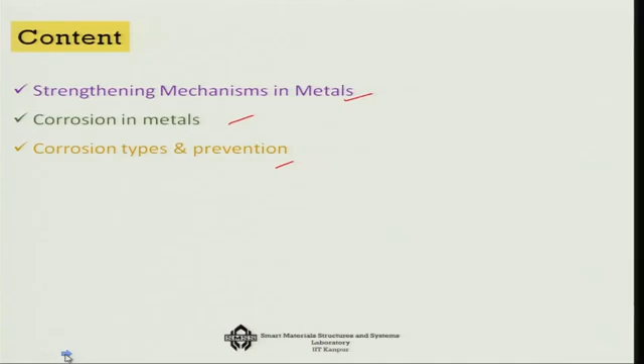So, strengthening mechanisms in metals, corrosions in metals, and some of the corrosion types and their prevention. This is what is our object of study today. Now, first of all, the strengthening mechanisms in metals.

One thing we have already seen is that dislocations, if present in a metal, degrade the material properties. As long as the dislocation is limited inside a particular grain, there is no problem in the sense that the macroscopic properties will not be much affected, but if many adjacent grains get affected by dislocation, that would substantially affect the mechanical properties.

So the ability of a metal to plastically deform depends on the ability of dislocations to move across the grains. If you can stop this movement across the grains, you can make a material harder and stronger. There are several ways to do this: one is through grain size reduction, then solid solution strengthening, and of course there is strain hardening, precipitation hardening, etc.

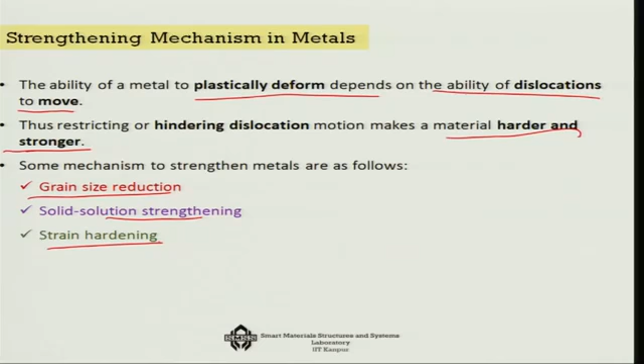Let us try to look at some of them one by one. First of all, we discuss grain size reduction. The grain boundary acts as a barrier for dislocations, as we just said, but how does it act as a barrier for dislocation? There are two reasons by which it can happen.

One is the misorientation: if two grains are there and their lattices are not oriented the same way, it will be difficult for a dislocation to pass into another grain. So if there is a loss of alignment between the lattice structure of the two grains - suppose you consider this to be one grain and then you have this one, the two lattices are not aligned - there is an angle between them. So then it will be difficult for a dislocation to move from this to the next lattice. That is what is called misorientation.

Now, imagine that in terms of number of grains in a particular surface area, if you have more and more of these grains which are misoriented with respect to each other, it will be more difficult for the dislocation to affect all of them on a statistical scale. So the more grains it will face, the more difficult it will be for the dislocation to pass. That is one reason why smaller grains, meaning more grain boundaries, would stop dislocations very effectively from moving across the grain boundaries.

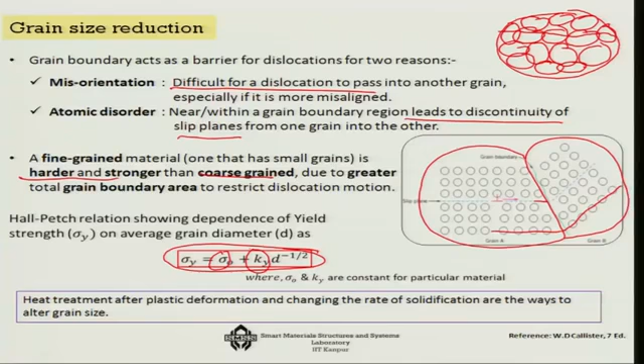Interestingly, Hall-Petch found that this same relationship holds not only for mild steel but for other materials too, and people have experimentally determined these Hall-Petch constants. For copper, sigma 0 is 25 MPa and K is about 0.11 MPa meter to the power half; for titanium it's 80 and 0.40; for mild steel 70 and 0.74; for Ni3Al it's 300 and 1.7.

Now, one important thing is that it is the K value which actually determines how much effect the grain diameter D will have on the overall sigma y.

So suppose I consider mild steel, and I take the grain diameter ranging from about 100 nanometers to about 1000 nanometers, using sigma 0 and K values such that sigma y equals 70 plus 0.74 times d to the power minus half, and plot all these values.

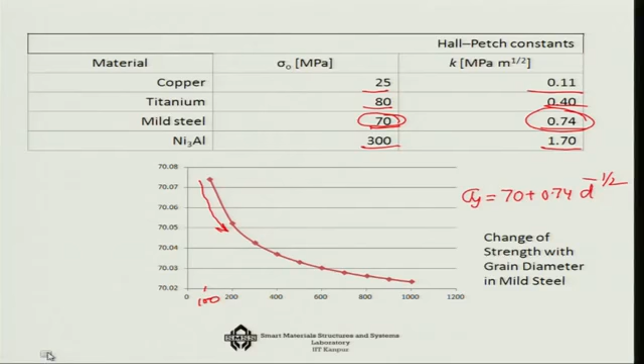We can see that as the grain size increases, sigma y decreases, even though not at a very high rate. So the Hall-Petch relation nicely describes how grain size affects the strength of mild steel, and similarly for other alloys.

Now let us talk about another form of strengthening, known as solid solution strengthening. In this case, strengthening occurs because of the so-called pinning of impurities inside the grain, which stops the growth of dislocations or dislocation piling.

In fact, pure metals are almost always softer than their alloys. Why? Because in alloys, as I talked earlier, the alloying atoms substitute into a solid solution or occupy interstitial spaces. Whenever these impurities go into interstitial or substitutional positions, certain effects occur.

If the atoms that go inside are larger in size than the host atoms, a compressive strain develops, while smaller impurity atoms impose a tensile strain on the host atoms. A larger atom gives a compressive strain because it takes more space, pushing all the other atoms inside the grain. A smaller atom causes others to move toward it, resulting in tensile strain.

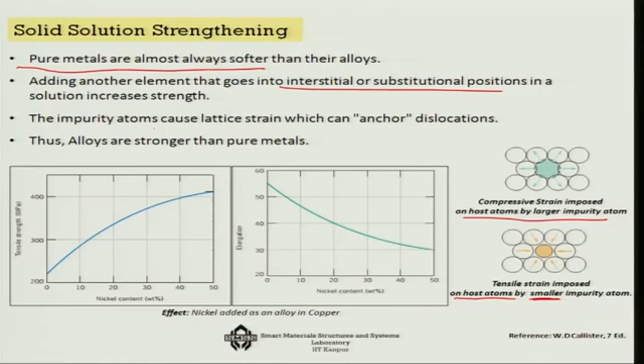In both cases, you can influence the dislocation stress, which is denoted by the Burgers vector, with the help of impurities. So impurities can effectively anchor these dislocations, which is why alloys are generally much stronger than pure metals.

For example, consider nickel weight percentage in copper: as the nickel alloying content increases, the tensile strength increases, while elongation decreases because the material becomes harder and harder. That is another strategy for making pure metals harder, by inserting impurities.

Now we will talk about strain hardening. In the other cases you are playing with the grain structure, but here you are not. Instead, you use work hardening or cold working in such a manner that strain is imposed on the nearby atoms inside the grain structure, thus increasing the strength of the material.

That strain increases the strength, as you must have seen in the stress-strain diagram itself, where beyond a certain percentage of strain, a strain hardening region occurs. The idea is similar in the formation of the metal itself, where this technique is used and hardening happens to the system.

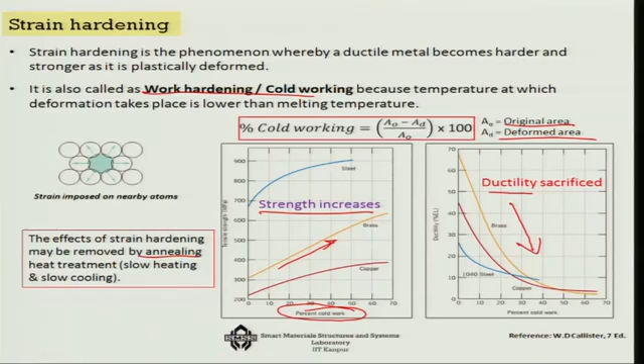Now, the strength that is increased can sometimes be controlled through annealing, a heat treatment process. Through slow heating and slow cooling, you can release some of it, and thus bring about a trade-off solution between the strength and the ductility of a system.

So far we have discussed three methods. One is the refining of the grain boundaries, as these grain boundaries serve as barriers to dislocation motion. By having a more refined polycrystalline material, you can increase the strength. Of course, there is a degree up to which you can do it.

Later on, there's something called the reverse Hall-Petch effect. People found out that if you reduce the grain structure beyond a certain level, this becomes counterproductive, and it actually depends on the size of the dislocation. If suppose the size of a dislocation is 10 nanometers, and you bring your grain structure to a similar level, then it would not be difficult for the dislocations to get piled up across the grains anymore, and hence instead of increase of strength, you may see a decrease of strength. So the reverse effect may happen if you reduce the grains too much. There is an optimal level of grain size for every metallic system.

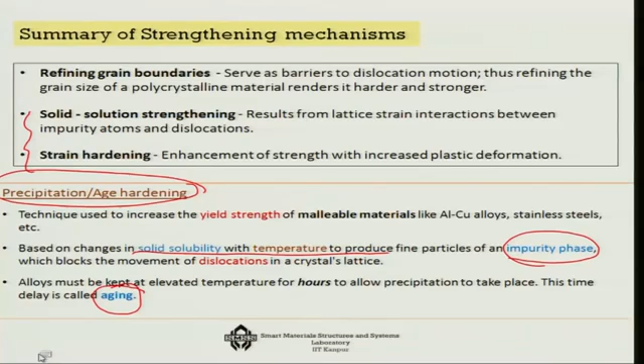Based on the changes in solid solubility with temperature, you can produce fine particles of an impurity phase, which can block the movement of dislocations. For example, at a slightly higher temperature, you may see more impurities spread over inside a pure metal, and they act like nucleation points. Then, as you keep it at a very low cooling rate, gradually these impurities affect the grain formation, and as a result affect the hardening. This process of changing temperature to change solubility and later allowing more time for grain growth is known as aging. So precipitation and age hardening, these two things actually go hand in hand. This is another mechanism for controlling the hardening of pure metal.

Now, so far whatever we have discussed is related to the improvement of the metal. However, metals also suffer from a problem that ceramics would not suffer from: they get corroded. I have talked about this in the very beginning, if you remember, I showed you the periodic table and the relative positions of the metals, and their tendency to give away electrons. As a result of this tendency, they can easily react with the environment, and those inorganic materials which can absorb these electrons can quickly react with these metals, and this results in corrosion.

These corrosions are definitely destructive, unintentional attacks on structures, and they are basically electrochemical in nature. You can see the corrosion of a ship, an automobile, or a pipeline. In every case, the corrosion creates a severe problem.

Now, the material loss that takes place can be either through dissolution or through formation of scale or a film. That means the reaction takes place and the compound forms over the surface like a film or a thin scale. For example, you take an aluminum vessel, put water in it, and try to heat it up, and you do this several times, you will gradually see a layer of aluminum oxide formed over the aluminum at higher temperature, coming like a green sheet over it. So like a thin scale or film.

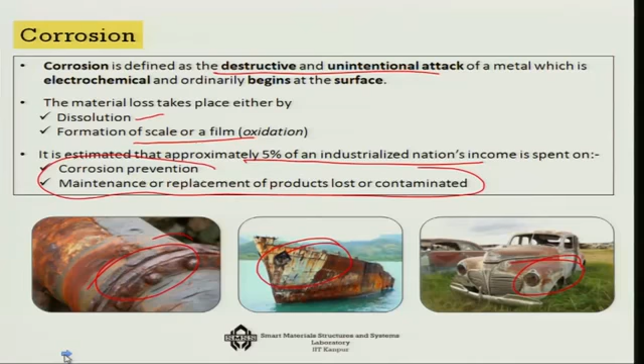There are various ways in which this takes place, and approximately 5%, even higher in some cases, of industrialized nations' income is generally spent on corrosion prevention, maintenance, etc. So that means it is a big issue for various systems. Now, there are two parts of these kinds of chemical corrosions: one is the oxidation reaction, or anodic reaction.

This relates to the tendency of metals to give up free electrons, which is the anodic part. The cathodic part is the opposite, where electrons are transferred to another chemical species based on their position in the periodic table, determining their ability to accept electrons.

For example, zinc can readily give up two electrons, which can be taken up by hydrogen. The moment you keep zinc, it converts to zinc ion and hydrogen gas is formed. In fact, zinc is often given as a sacrificial layer coating, so that it reacts readily and saves the metal.

So, I will talk about the significance of this type of layer.

When we select a material to provide a protective layer over the original material, there is something called the Pilling-Bedworth ratio, PB, which is the volume of the oxide formed during reaction divided by the volume of metal consumed in the oxidation.

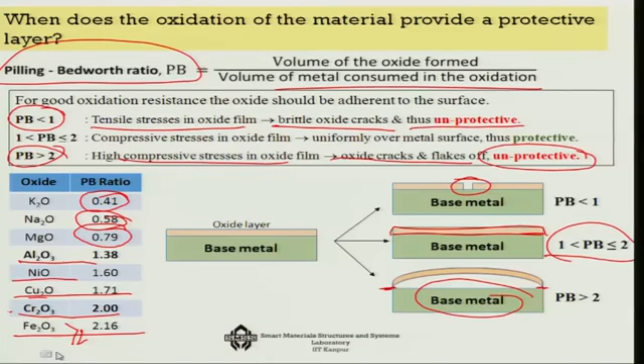Then there are other metals going further, like chromium, which is possibly the last usable one. Beyond chromium, the ratio is greater than 2, so it cannot be used as a protective material. Thus the PB ratio works as a nice guide in choosing materials.

The other point is the reactivity of a metal in seawater, which is very important particularly for seaworthy vehicles. Susceptibility to corrosion in seawater reduces as you go upward in the series.

Consider Monel, which is very heavily used today for seaside nuclear power plants, because of its high anti-corrosion capacity. We already noted the advantage of nickel on copper in terms of high strength, so both from a corrosion and strength point of view, Monel is an excellent material, and Inconel is another one.

In fact, the secret of making this material is very industrially significant, and not many nations would like to part with these trade secrets.

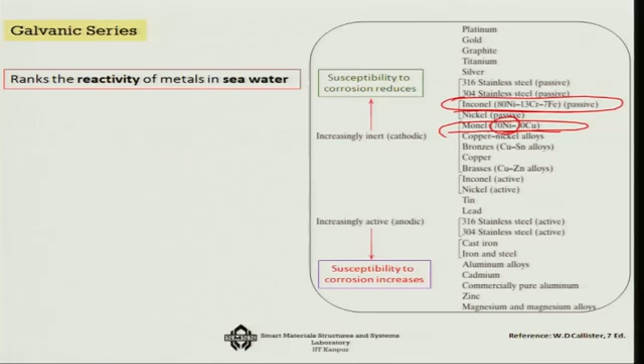Then you have stainless steels, titanium, graphite, gold or platinum, which are even better but cannot be used practically. In terms of susceptibility, you have to be cautious about using iron, aluminum alloy, and cadmium. Zinc is highly susceptible, as we have seen. So the galvanic series gives us good guidance on the reactivity of metals in seawater.

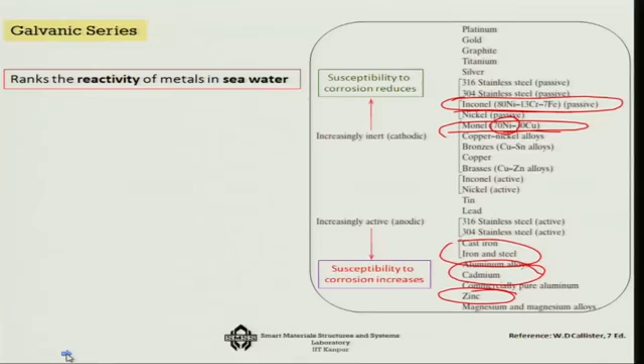Corrosions are generally of two types. One is uniform attack corrosion, the most common form. As you can see in this jetty, the anchoring positions are uniformly attacked due to salty conditions. Oxidation and reduction reactions occur randomly all over the surface, resulting in maximum metal loss in this kind of uniform attack.

The other type is known as galvanic corrosion. This is a very specific case where two different types of metals are used for joining or doing some work, like a junction of two different types of metals, say a copper-steel junction. This kind of thing happens in boilers, for example, and in aircraft wiring systems, wherever you are anchoring these wires, those are junctions with dissimilar metals in the galvanic series. They come into close contact with each other due to mechanical actions, and the moment that happens, there will be a kind of cell formation.

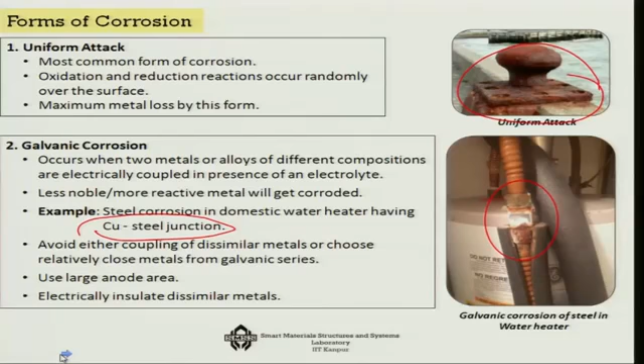So one will work like a cathode and the other will work like an anode, and as a result there will be continuous corrosion of material from one to the other. So this is galvanic corrosion. It happens because of very specific applications where dissimilar metals or materials are in contact with each other.

Then there is intergranular corrosion. This occurs along the grain boundaries in some alloys like stainless steel at high temperature for a long time. If you keep it, what happens is, for example in steel, the heat causes formation of chromium carbide particles along the grain boundary, and this creates corrosion along the grains. This is particularly important in high temperature, long duration situations, such as for turbine blades.

Then there is stress corrosion. This occurs where you have a high level of stress as well as corrosion due to chemical reasons. The high stress aggravates the problem because the material gets weaker and there will be a larger surface exposed, and as a result the two effects help each other increase the corrosion process.

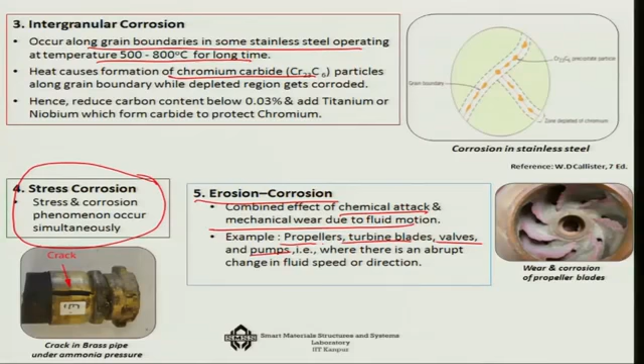The other one is the erosion corrosion process, which is a combined effect of chemical attack and mechanical wear due to fluid motion. For example, propellers, turbine blades, valves and pumps, even pipelines, where abrasive particles carried by the pipeline cause both erosion and corrosion. So there is a combination of wear and corrosion. Either stress and corrosion, or wear and corrosion, these are even more severe conditions—it's not only corrosion but also something more that affects the system.

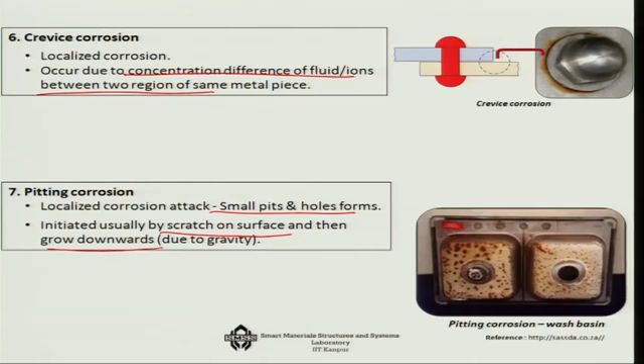Then there is crevice corrosion. This is a localized corrosion that occurs due to concentration difference of fluid ions between two regions of the same metal piece. So the concentration difference of fluid creates the corrosion. Pitting corrosion involves small pits and hole formation; it generally initiates from a scratch on the surface and then grows downward due to gravity. So these are various forms of corrosion possible in a system.

Now, in terms of corrosion resistance in aerated water, it is the environment which is important. Lead alloy, steel alloy, titanium alloy, nickel alloy, and copper alloy all give high resistance, but aluminum alloy does not. Low resistance is particularly seen in carbon steels.

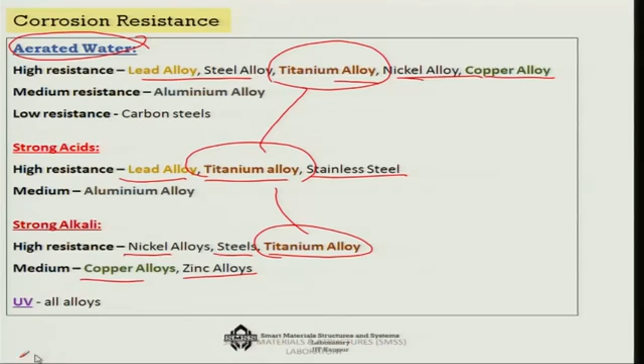In a strong acidic medium, titanium alloy, lead alloy, or stainless steel perform well, while aluminum alloy is medium. In strong alkaline conditions, nickel alloy, steel, and titanium alloy work well, with copper alloy and zinc alloy being medium, and under UV, generally all alloys hold up. One common thing we see is that no matter the medium, titanium alloy is good in most corrosive environments.

That is why titanium alloys are heavily used in corrosive environments. There are certain strategies for corrosion prevention. One is to use a material, based on the Pilling-Bedworth ratio as mentioned, which can form a good protective oxide layer. Another is to add inhibitors, such as amines and hydrazines, which can remove oxygen, since oxygen causes most corrosion. Another is to reduce temperature, since we've seen that high temperature increases corrosion, so reducing temperature decreases the corrosion rate.

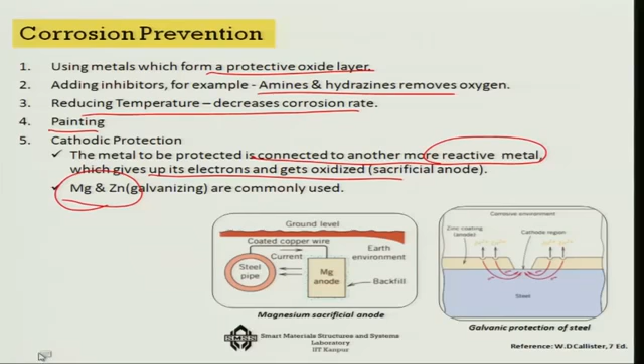Apply paintings, chemical coatings, or go for cathodic protection, where the metal to be protected is connected to another more reactive metal, which gives up its electrons and gets readily oxidized in a sacrificial anode. This is why people used to carry zinc on ships in earlier days, because the zinc would be oxidized and sacrificed, but the ship's metal would be saved. Magnesium and zinc are most commonly used for this purpose. So these are the various methods for corrosion prevention.

This is where we will come to an end, and in the next lecture we will talk about ceramic materials, their classification and crystal structure. Thank you.